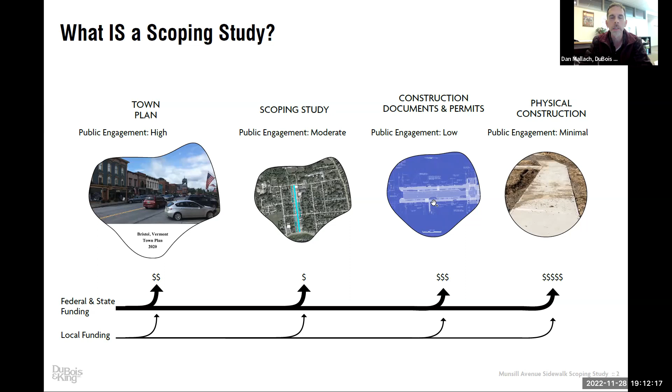Just briefly again, the scoping study is part of a process that looks at technical feasibility. It tries to generate quite a bit of public input into the process. It doesn't mean the town is committing itself to do anything, but it's a very important part of the planning stage of any project, and it's what agencies such as VTrans look for when potentially funding that project. If the town were to move forward, it would then go into construction documentation, permitting, and construction itself.

Part of the scoping study process is to generate a purpose and need that is approved by VTrans. The purpose is to study the feasibility and appropriateness of various alternatives for safe pedestrian facilities along Munsill Avenue between West Street and Pine Street - those two blocks with Pleasant Street perpendicular along the middle.

The need is both the presence of Bristol Works, making this a dynamic residential, commercial, office, and institutional block, and there's a bus stop up at Bristol Works. There's a lot of access issues, both to downtown, to the recreation fields, and to Mount Abraham Union Middle High School. So Munsill Avenue is integral to that network the town is continuously trying to build out.

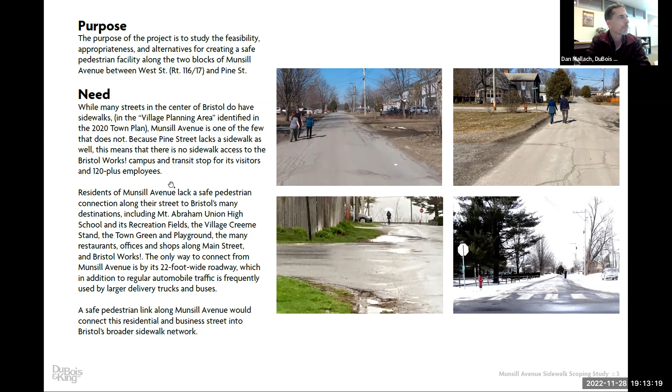We really focused, especially given that we're just looking at 2 blocks, on as much public outreach as possible.

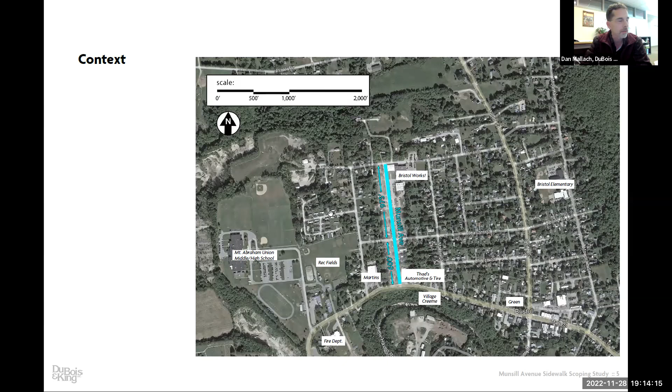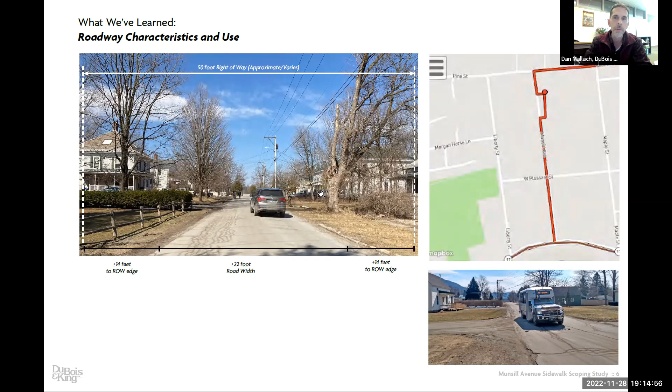As part of a scoping study, you look at the existing conditions in some detail - the width of the right-of-way, which is important to understand if a sidewalk were slotted in, whether it would be within the area the public by right has access to. That doesn't mean this isn't property of folks, and we can be sensitive to both the trees and yards that might be encroached upon should a sidewalk be built. But it's instructive to know there's about a 50-foot wide right-of-way along Munsill Avenue where the town could do work, and the pavement itself is about 22 feet wide for the length of the road.

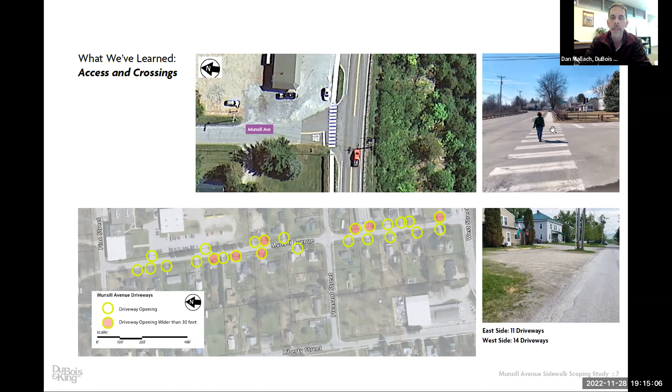We looked at access, including that 80-foot plus crossing at West. These are all data points and ideas that feed into a final design and considerations.

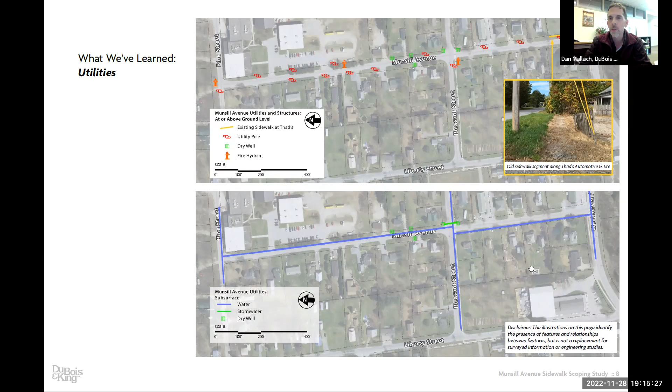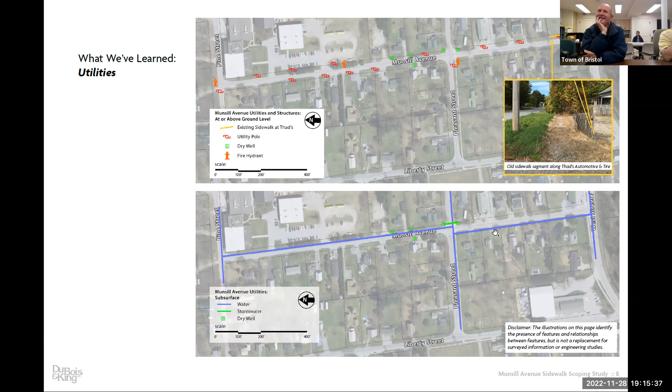Of course, utilities - critical, especially if and when something were to get built, designed, and excavated. It's interesting that you have utility poles and hydrants on both the east and west sides of Munsill Avenue, and subsurface water lines on both sides as well. Sometimes utilities are very instructive, especially from a cost and feasibility standpoint, about how to do work - perhaps less so along these 2 blocks, given that they go back and forth to each side.

Stormwater flow is obviously an issue. Eric has spoken about the corner of Pleasant and Munsill, and there's potential sometime in the future for additional stormwater management infrastructure. We'll note that 2 of the alternatives we've discussed have curbs - a curbed sidewalk right along the road also introduces its own stormwater management needs, with elevated costs to put in dry wells, for example. But this is also an opportunity, should work be done at Pleasant and Munsill, to combine costs and efforts into building a sidewalk, if that work will be done on a similar timetable over the next few years.

Trees, I would say more than any other single thing, the residents - both in personal conversations and in open-ended survey comments - expressed how important the trees in their own yards and generally to the character of the street in Bristol are. We weighted the tree removal component accordingly, and we'll see that in the matrix.

Your tree warden was very generous with his time to walk around and look at the individual trees and their sensitivities. That includes the cedars at Bristol Works, which not only are attractive but also offer screening to the parking lot there, for both the residents across the street and people driving by. So what to do with those cedars was another thing we explored in this scoping study.

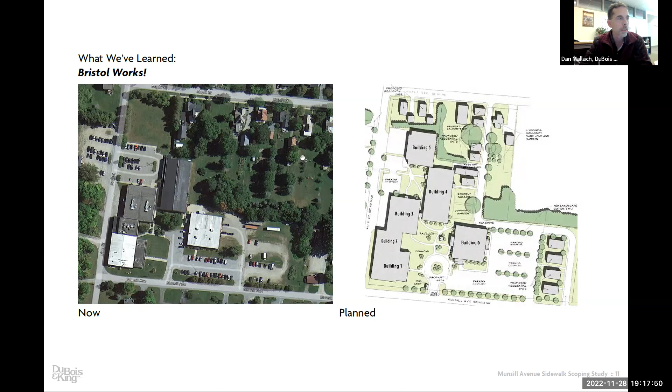The local concern survey had about 31 responses. More than half of the respondents are on Munsill Avenue daily. There was about a 2/3 preference for an east side sidewalk, and more than 2/3 preference for it being right along the roadway and curbed. That probably reflects the extent to which residents did not want the additional encroachment of a buffered sidewalk, which would not only be the 5 feet of concrete itself, but an additional 4-foot grass strip right along the road.

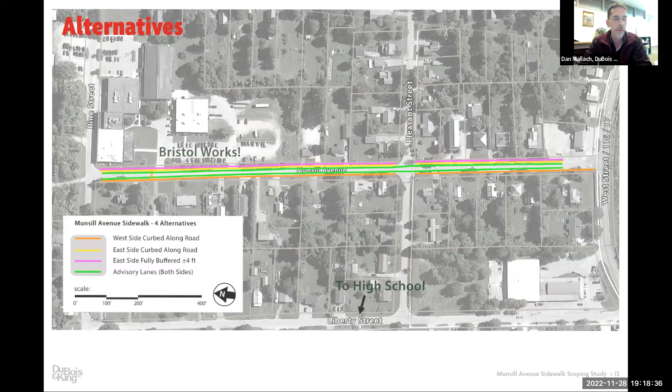Now, the alternatives that we looked at, many of you have seen these already. Any scoping study that we do with V-Trans, including the one you're doing over on Airport Drive, has to have a no-build option. It could be that the town looks at the options, the feasibility, the scores, and the public input received, and says, well, this was worthwhile, but no thanks.

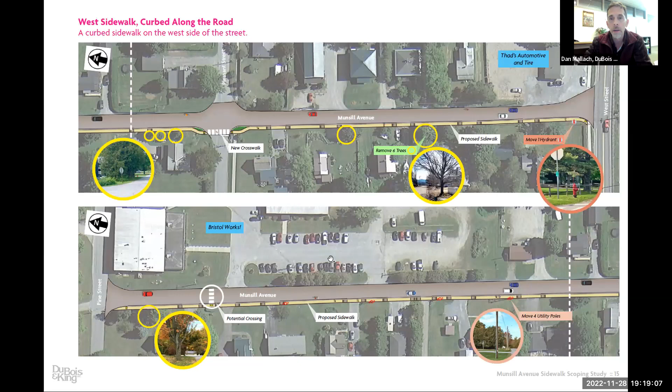And so that's the no-build option, and we always want to make sure it's presented to you. However, for the sidewalk options that are actually concrete, we looked at a west side sidewalk, curbed, and the potential construction hindrances from having to move a hydrant, which is doable. It's not easy, but it's doable. Removing trees, 6 trees in this option. The west side has a little more heavy on street trees close to the road. We also looked at the number of utility poles that would have to be moved. That's also feasible and doable, but it's a cost.

This is a mock-up, a photo simulation of what that west side curbed sidewalk would look like. So the west side of the road, 5 feet wide, curbed right against the road. That would also include, in terms of cost, the installation of dry wells to catch the rainwater and runoff traveling along the edge of the curb, so it doesn't feed out onto either Pleasant or West Street. There's a gentle slope from north to south along Munsill.

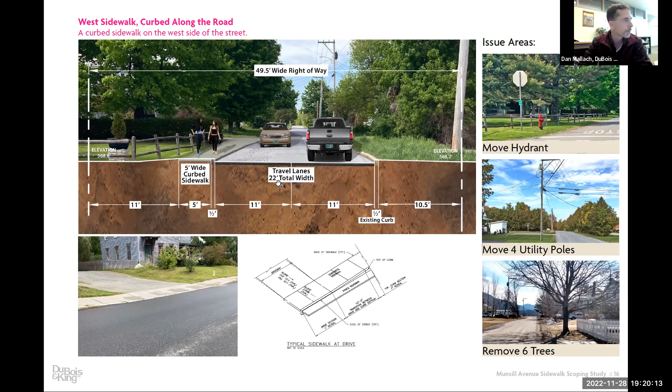East side, same thing, but curbed. There's the additional interesting opportunity to work with Thad Searle at the corner. He is not keen to have anything that might interrupt the flow of trucks through his property. We'll see a little later that we looked into how we might be able to both accommodate the truck flow through his property, as well as potentially solve some stormwater management issues on his property that he identified.

But essentially, an east side curb sidewalk is just like the west, in that we looked at hydrants, utility poles, and tree removals along that corridor. Here's a mock-up of what the east side would look like, up here at Bristol Works.

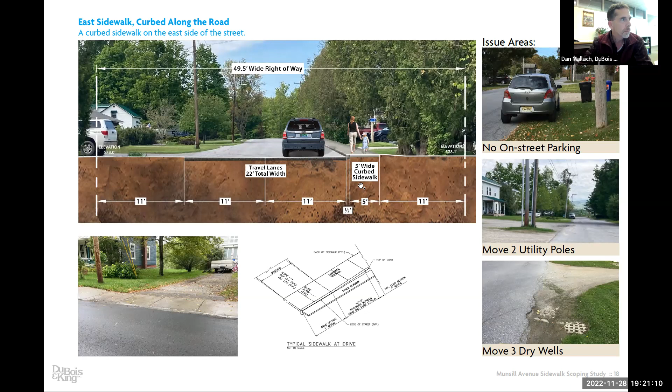East side buffered. Now, a buffered sidewalk on a road like Munsill Avenue - you'll see it on Maple, Liberty, Elm, what have you. Most of the sidewalks the town has constructed along village streets like this are buffered sidewalks. Sometimes it's 4 feet, sometimes 2, sometimes 5. It really depends. What a buffered sidewalk allows is slightly lower cost, because you're not building the curb, you're not putting in the dry wells.

You also allow for the continuation of on-street parking, and that's another thing expressed by some residents as a concern - that overflow parking from their driveways would be cut off. However, we're still looking at the same issues in terms of moving utility poles and hydrants, somewhat more so, because we're that much further - 9 feet instead of 5 feet further into the properties.

And we're also looking up at Bristol Works at a very heavy prune of those cedars. We have a little more of that moving forward, but here's a mock-up of what that buffered sidewalk would look like. We're here down at Thad's.

We had one of our transportation engineers take a 22.5-foot Hino truck, approximately the wheelbase and overall length of a tow truck that might service Thad's, and run it around every which way, about 7 or 8 different directions through the property. We also noticed that the curb - there's a faint black line you can perhaps see along here on the Thad side where it meets West - is much broader than the curb over on the west side here.

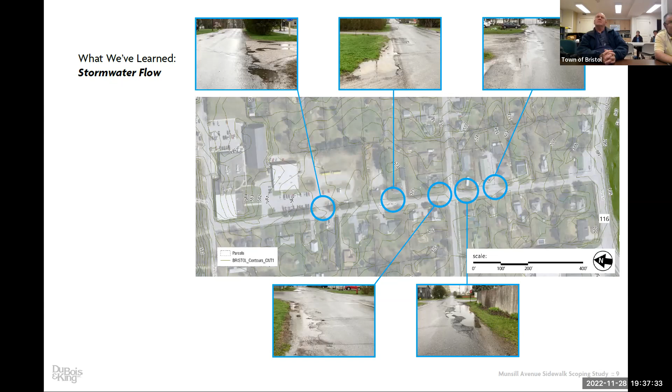So my last question is back to that money chart you had. That was about 200 and some odd thousand to do a buffer with no curb. But that doesn't include any drainage. Right, and any of the drainage included there doesn't solve our drainage problem.

No, but is the 430, the one with a curb on the east side, does that include drainage or no? Yeah, I think that could be designed. What that includes is one dry well per 100 feet.

Along the 1,200 to 1,400 feet of new sidewalk construction, I think that could be designed well enough to capture that stormwater very well, at one per 100. So with 1,400 feet, you're going to have 14 dry wells.

Also, Dan, if I'm thinking about this correctly, on the west side we'd also have to replace or move two hydrants, correct? There's one at the corner on North Street and the one at the corner by West Pleasant. I think the one up at West Pleasant is far enough from the corner to not require shifting, though it's significant excavation to get down there, add pipe, and move it back in a way that's still tight and usable by emergency services. But on the west side, I think we just have it as a single hydrant, the one down close to west by the fence there.

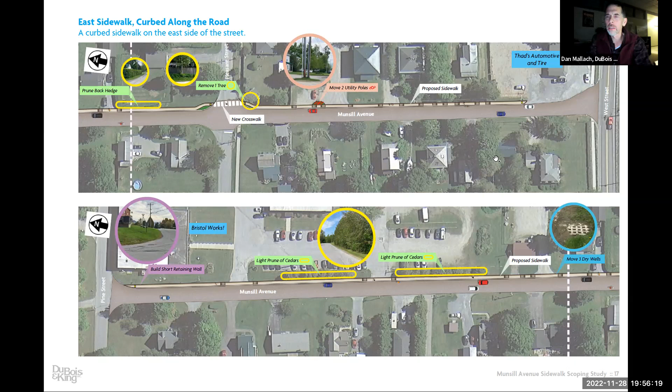There seems to be a general preference for the east side. Yeah, I'd say that's true - east side is my preferred. And just to step back again, this isn't binding anything on the town. It's really which option do you want this scoping study report to explore further. I guess my option is the buffered east side, with the curbing at Thad's.

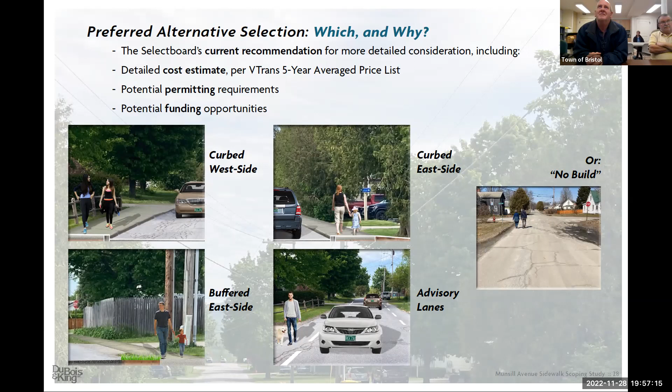I understand where you're coming from, but I also know that with a curb, the plow trucks are just gonna hit it and destroy it - no offense, Eric. And where it's gonna get destroyed the worst is on the curbs. So like at Thad's, if you put curbing there, when they back out, back down, and then they come back on, that's where the wing's gonna carve - possibly carve into the curbing.

I like number 3 - no curb involved, on the east side. I do as well.

I've recorded one upvote for the curbed and three upvotes for the buffered. Come on, Darla. Wait, so what was yours, and Joel's? Was yours number 2, or buffered? Buffered, okay. I heard curb - no curb, buffered. Okay, buffered with no curb, number 3.

If we had to cut it to a 3-foot grass strip to please the neighbors, I'd be more than willing to move on. Okay.

Alright, I'm a little conflicted in that I live here, and I feel awkward - I might abstain from this because I feel awkward saying not on my side of the street, or on the other side, or vice versa. Say whatever you want, Darla, you're entitled to your opinion. Well, true - I mean, we've already kind of all said the east side, so, like I said, that is where I see people naturally walking.

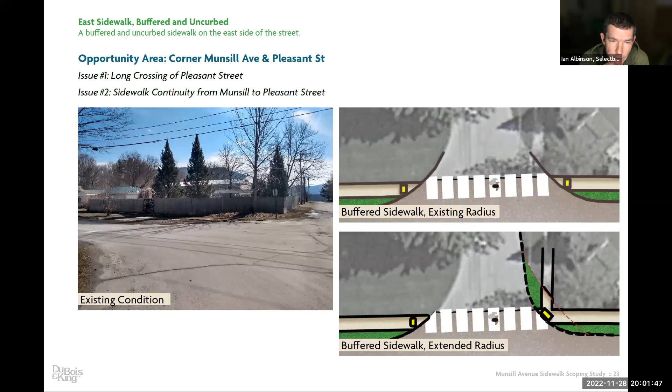If we decide to go ahead with this, we'd want to reach out to residents and discuss this. I'm sure, hopefully, all residents know about this. Obviously we've tried to do as much outreach as possible, and we would do the same if we decided to go in a particular direction with this.

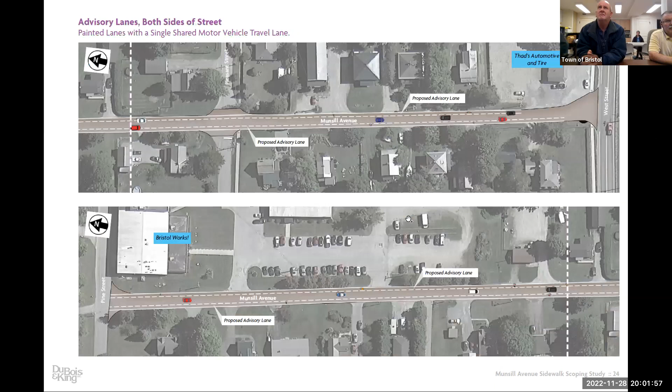Yeah, and the 3 feet up at those big cedars at Bristol Works may help, not chopping them completely down. You don't have the tops cut - in the Photoshop, the one you have is just pruned where people are going to walk. You're not taking the whole thing all the way up. No, not all the way up. I tried to keep a little overhead - it's a little clunky looking.

And you may decide once you do it, or see how it grows or doesn't over a few years, that it's not working aesthetically, functionally, or botanically. I think with the amount of traffic going in and out of Bristol Works - we've never had a problem there, but anytime I've come out of there, I've had to have my vehicle in the road before I could see because of those trees.

I don't think trimming them is - from a safety point of view, coming out of that parking lot - a good thing. That's interesting. And I won't put words in Kevin's mouth, but I think at the September meeting he wasn't opposed to a fence.

Right, no, he wasn't. Yeah, I was just going to say that, Joel. Kevin was open to doing basically whatever needed to get done, really, but he was very open to having those trees trimmed back. And Ian, remind me, I think he said they'd done that a while back, right?

Because it was sort of, yeah, as they were growing, they had done some trimming. This would obviously be much more extreme by putting this in, but I think he was amenable to the trees being heavily trimmed or even being removed if that's what people wanted.

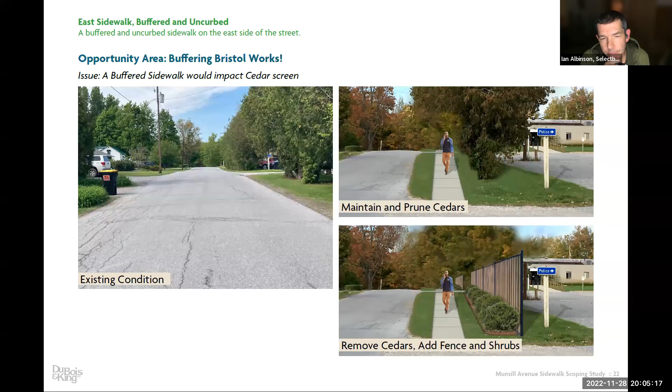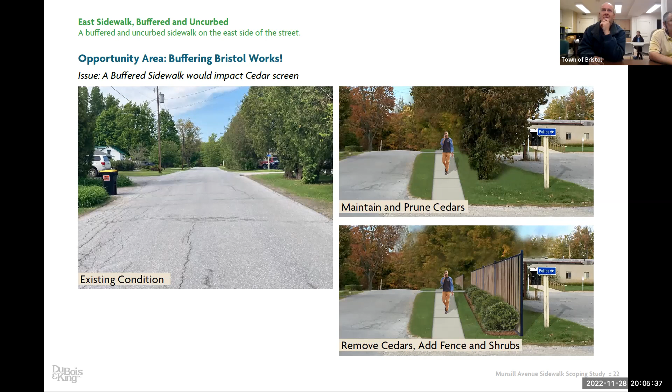You can have the best driver in the world and they're gonna hit them now and then. And you're right, the less experienced ones are gonna hit them more often until they get used to them. It's just, the main thing is when you make the corners, coming on the straightaways they're fairly easy. You can just pick a line of sight and go, you're good. It's when you pull on to them or come off and cut around, that's where you normally get the curbing hit.

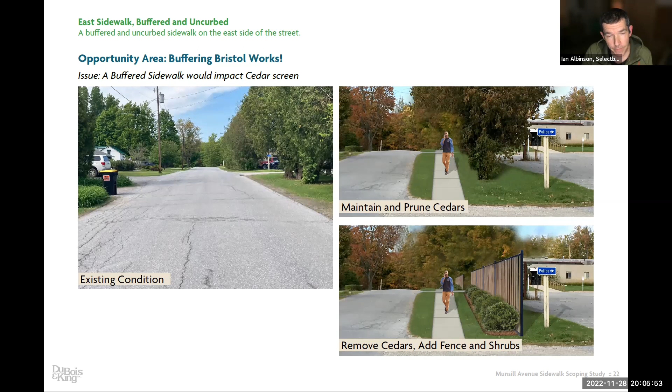Okay, so it's just basically on the entrances. Okay. Looking at this, let's say we go with number 3, buffered, and we decide to do that. That obviously saves us a good amount of money, which is always nice.

But we are looking at, we did want to improve the safety, which probably does mean putting curb in there somewhere. So we're still going to have the potential for that curb getting hit, because I don't see another way to improve that safety-wise without having a curb there, correct? And it's there now, it's just not as pronounced.

I mean, we got curbing on North Street and we got curbing where we turn out coming on the church, and it's not gonna be anything different. I was just trying to avoid more of it, that's all. Not a big deal.

Okay, is that other curbing concrete or are they granite sections? Concrete, everything except for Main Street is concrete. Now, certainly concrete's maybe less of a cost, but in your experience, is one or the other preferred?

That's a question for you, Eric. Curbing's curbing. Granite's harder, it lasts twice as long, correct? Yeah, but no, whichever the board decides to go with, it doesn't matter.

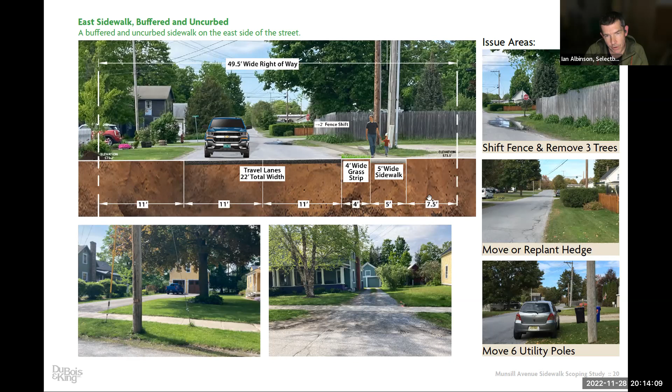So do we want to have Dan put in what he's working on, the curbing that he suggested down at Thad's, as part of his design? Let's go back to that slide, Dan, in terms of what your suggestions were. Sure, and again that's conceptual, but what this shows is the radius that would match the radius on the west side of this intersection. So it's leaving Thad almost all of his existing pavement, and based on the truck turnarounds, which we'll update, especially with a rolled curb for part of it or a tapered curb, we think he gets 95% of the motion he'd need for vehicles, the other 5% being the creativity of drivers we see negotiating areas. And then a flush sidewalk.

I don't know that the curb has to extend beyond the sidewalk on West Street. Having it come back up in between those two spots, I don't see where that's going to be helpful to us at all. Well, it's helpful in terms of a safety thing, right, narrowing that distance. He's talking about the inside of Thad's, from the curb, the little green space between West Street and the sidewalk. That's curbed already, right here, so continuing that curb to the end of that sidewalk there. But after that, you've got to drop down to accommodate that sidewalk to meet the road, then you'd have to come back up and then back down.

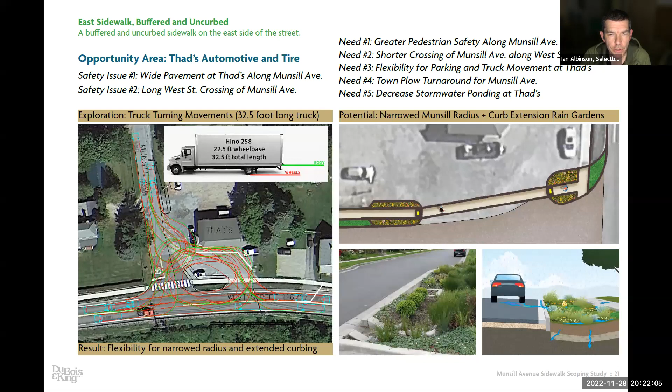See you. All right, let's move on in our regular business. Number 2, park use application, outdoor live nativity at the town green on Sunday, December 11th, from 1 p.m. to 6 p.m. I think we have some people here.

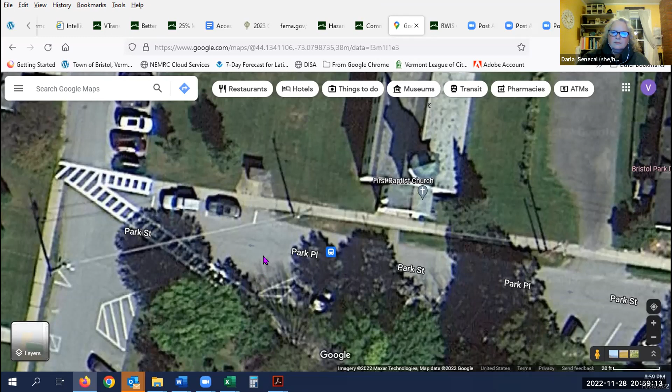Well, maybe we could - I was thinking, lay it just like this. Can we crowd that? Can we crowd it if we eliminate that diagonal crosswalk - can we slide that parking spot ahead? Yeah, you could slide them both ahead as long as you don't go beyond where the cars are parking on School Street.

And maybe we only end up losing one - you might not lose any of them. Because if you slide that first car, say, put it around to the front right there, that's not gonna be farther than School Street, so the cars are still gonna be able to get up and down School Street. And then you go straight across, you're gonna have your footage, and probably not lose any spacing.

Maybe the one where it comes out of the park. Well, if you move that parking space forward, then you interfere with visibility coming from the south. That's what I was gonna say. Make it just as bad, losing one - you're right.

How about just moving the gray car, going right across about where that white line is behind that gray car, come right back over to the crosswalk. Yeah, if you could do that and lose only just that one spot.

Or possibly this last diagonal one. Or you could shove that down far enough so you didn't - not if you want to connect it to the sidewalk, because that's where the sidewalk comes onto the street.